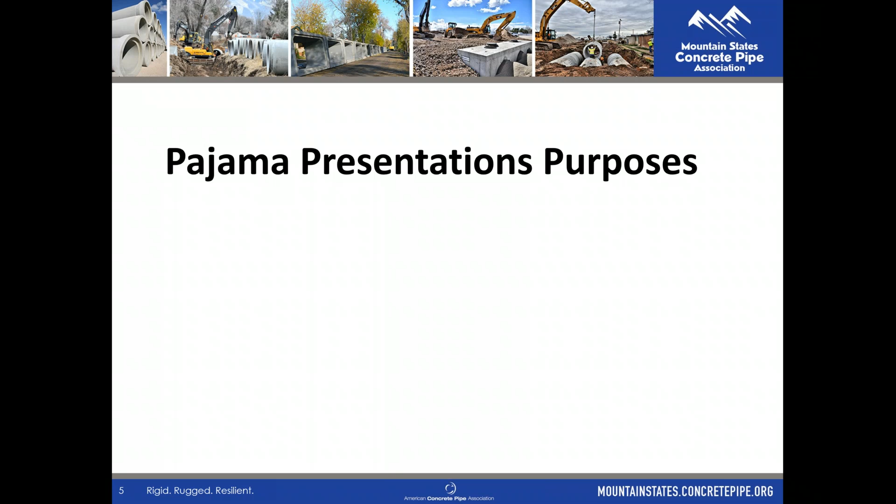So the purposes of these pajama presentations: one, the hope is that we can build some technical skill and provide you with continuing education. I'll be sending out on Monday a professional development hour certificate for 1 PDH for those who need that for engineering licensing. We're hoping we can provide some level of technical skill and help you learn a bit more about pipe or other topics that can help you in your career.

The second purpose is that we're hoping we can provide you with a little break, maybe a bit of entertainment. We're hoping you find some joy and fun in what we present, just hoping to break up the day. A lot of you are working from home or in situations where maybe there aren't as many people around as you're used to, so hopefully this is an opportunity for a little break.

Last but not least, and certainly most important in my mind, this gives me an opportunity to once again be the center of attention so everybody can listen to me and sit as a captive audience, and I can be that center of attention.

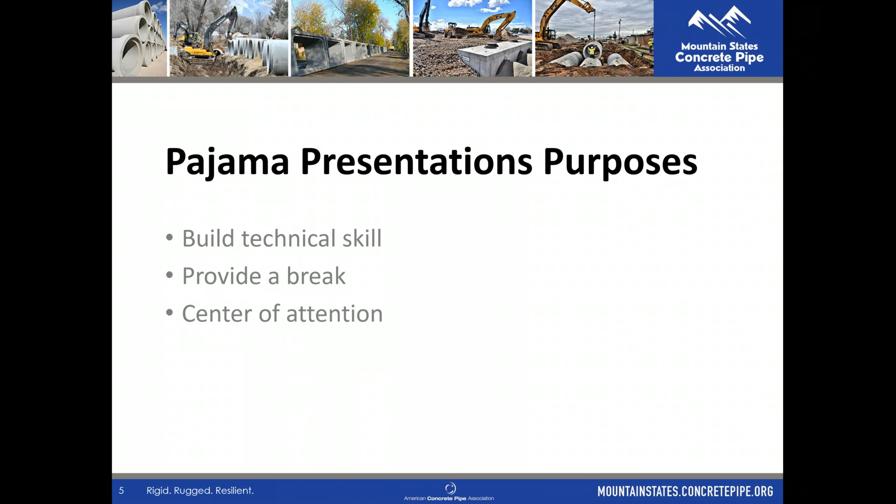As I mentioned before, I do give these in my pajamas, so I always share a picture of what pajamas I am wearing this week. In weeks past I had my Superman, my Santa Claus, my Batman jammies. This week's pajamas are as follows.

My unicorn onesie. I was going to stop you, I was nervous. Nope, this is my unicorn onesie, I'm very proud of this. Are you sure that's not Aubrey's unicorn onesie? That is my unicorn onesie, a gift from my sons. They thought it was hilarious, I thought it was too. Now I wear it unironically and they get ashamed. They bought it for me as a joke and I wear it unashamedly. If I have to go out and get the newspaper or the mail, you better believe I will wear this out in public just to embarrass my children—that's the goal there.

So with that, why don't we do our first poll? I like to do this first poll every week just to check and make sure our polls are working. I'm going to launch that right now. The poll is: are you currently wearing your pajamas? Feel free to answer that question. We'll give it a few minutes to make sure these polls are working.

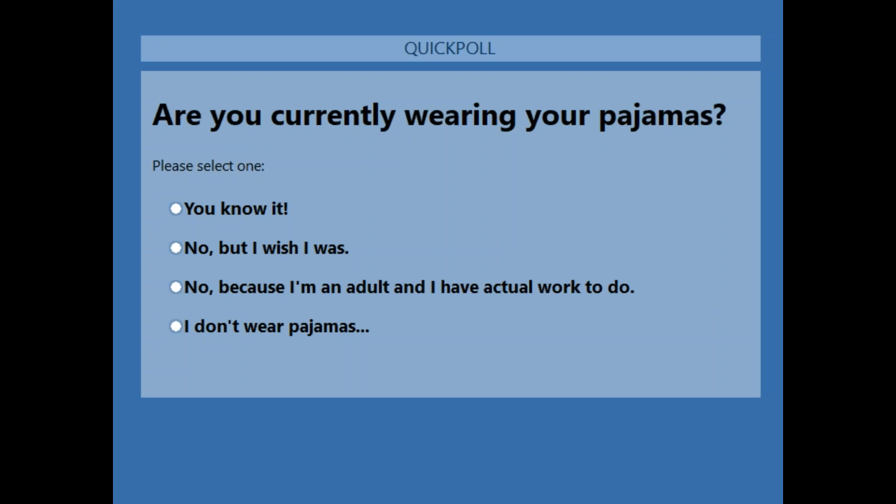Okie doke, it looks like we've got quite a few of you voted there. I'm going to close that and read you the results. It looks like we've gone up a little bit every week on the yes. This is the fourth time I've asked this question—it's gone up from 10% to 12% to 15% and now 16%. Most of you no, but you wish you were—don't I know that. 27% said no because I'm an adult and I have actual work to do, well done. And 27% of you said I don't wear pajamas—ooh, look at you. That maybe was wildly inappropriate for me to share that.

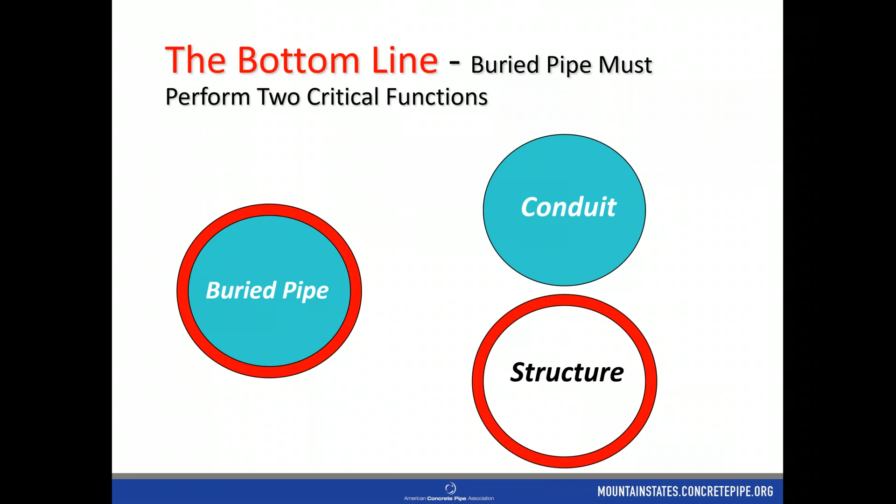Keep that in mind as we focus today on concrete pipe, which we refer to as a rigid pipe material. Other rigid pipe materials would be like clay pipe, which we saw a lot of years ago. I remember replacing a pipe in a sewer line in Ogden City that was almost 96 years old—a clay pipe—and we upsized it to a larger diameter, but it was still in great shape. These rigid pipes will last a long time.

Concrete pipe or rigid pipes are structures that are bedded with soil, so it is an actual structure. Depending on the class of pipe we're specifying, the pipe itself is responsible for between 70 and 90% of the total system strength of that pipe system. So the pipe itself is very strong and durable. The other crowning characteristic of these rigid pipes, especially reinforced concrete pipe, is the long service life. If you were here a few weeks ago, we talked about the City Creek project that was over 100 years old, with portions still in service today and in pretty good shape. These things will last a very, very long time.

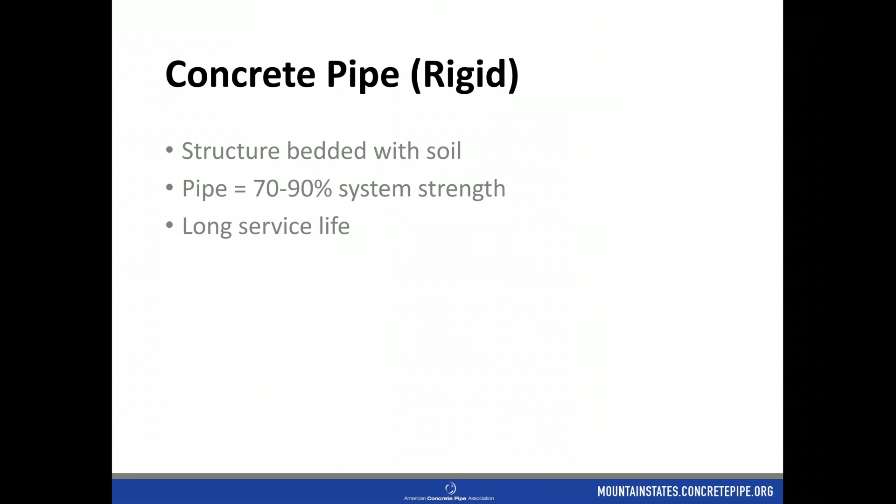One reason is the material. Concrete pipe, we know, gets stronger over time as it cures. But there are other pipes that, depending on the material, seem to fail a little more prematurely than 144 years.

So you have to ask yourself, why would this pipe last so long, and why are other pipes failing? It comes down to installation. This pipe that lasted 144 years and is still structurally sound was installed very well, using the best practices of the mid-1800s, with great care taken to install it correctly. A properly installed concrete pipe will last a very, very long time.

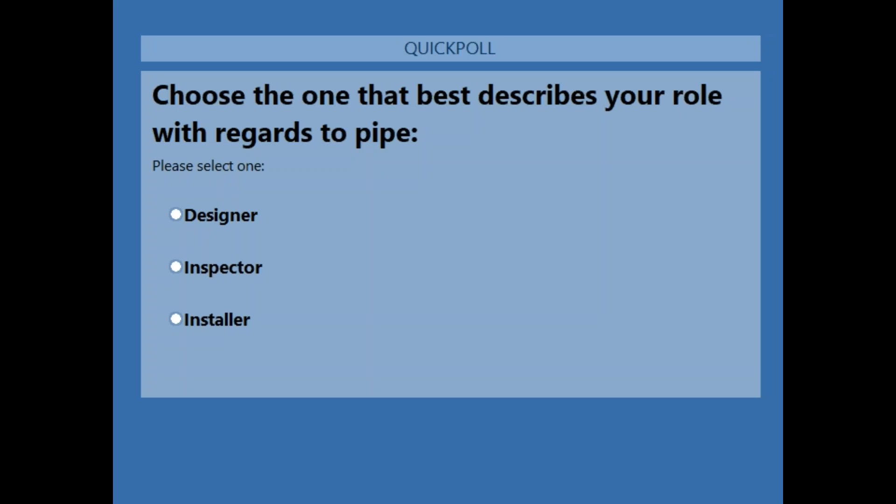Okay, it looks like a majority of you are saying that you're the designer, the project engineer and designer. A couple of installers too, but mostly designers — 78% say designer, 18% do inspection, and 4% are installers. Well, the good news is I've got something for everybody today, so hopefully everyone can take something from this presentation.

Let's move on. Since most of you are designers and engineers, I know how excited you get for good specifications, so we're going to talk about what specifications apply to reinforced concrete pipe. A few weeks ago we talked about ASTM C76, our manufacturing specification, which tells us what our wall thicknesses need to be, what strength of concrete we need, and how much reinforcing steel to put into the pipe. That's what we take into account when building and manufacturing these pipes.

We also talked about testing a couple weeks ago — our 3-edge bearing test and D-load test to determine the classes of pipe, covered under ASTM C497, the testing specification. Today we're going to talk about ASTM C1479, the installation specification. This is the national specification that gives recommendations on how we should properly install these pipes.

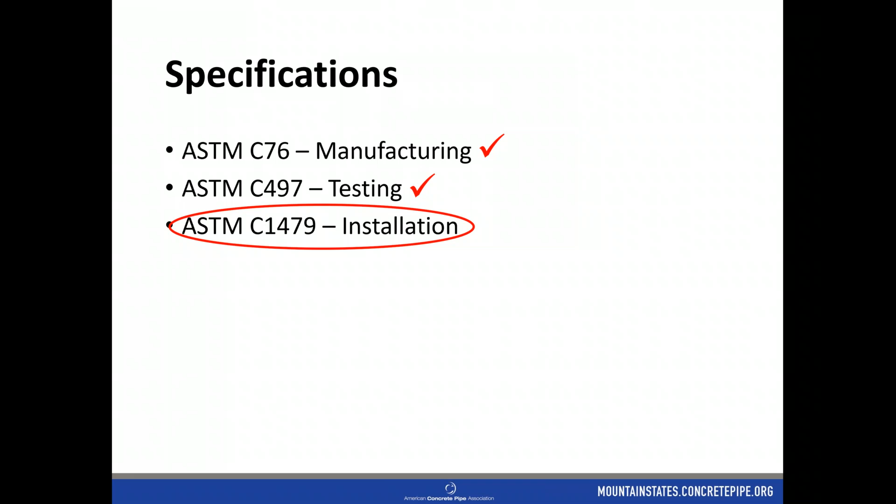At a high level, we're going to talk about two different types of pipe installation. The first, and most common one we see here, is trench installation, where the ground is dug, we make our hole or trench, and then put the pipe inside. There are some distinct design benefits to installing with a trench as opposed to the other type, which we'll get to in a moment.

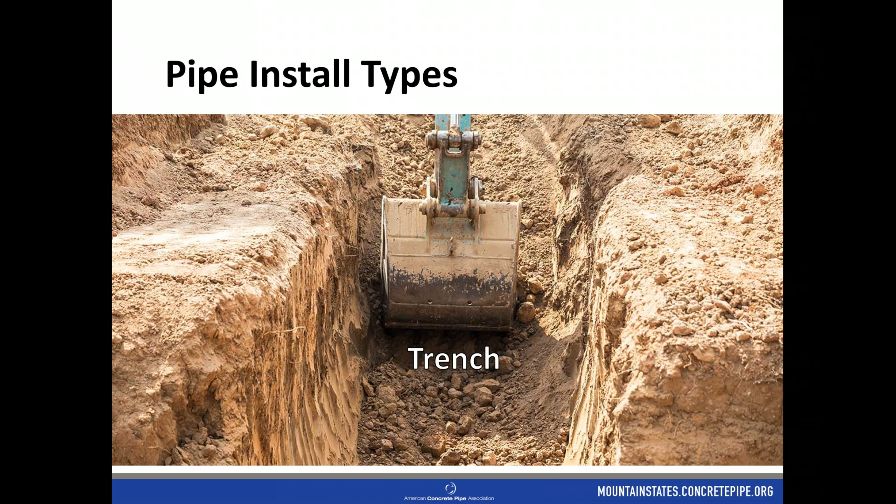With a trench installation, you have the sidewalls where a certain level of friction forces provides some support for the load on top. As we put our backfill material in, it binds and holds that in place, so it's actually a better design situation to use a trench installation. Keep that in mind when determining which class of pipe to use — whether we're using trench installation or the second type, shown here, which is embankment installation.

Okay, now an embankment installation is very different from a trench installation in that the pipe, as you can see from this picture here, the pipe is sitting on the ground, and then we're going to build up our road all around it, or whatever it is that's going under there, whether we've got a dam structure or something on top of that. But we start at the very bottom level. We put our bedding in, we put our pipe on that, and then we're going to build up around that pipe.

This installation method, admittedly, is not as popular here. We don't see it as often. You'll see it every now and then, so it's good to know about it so that you can remember the differences and remember that as we're determining class of pipe, we need to know, are we doing a trench or are we doing embankment? Because it could change which class you need to put in.

So trench, we dig the hole, we put the pipe in, we backfill. It's got the benefits of the friction of the sidewalls of our trench that are going to help and not have as much load on that pipe. Embankment means that we're building it up around the pipe, and it is going to have basically the full load of that material on top of it and the loading on top of it. So those are the differences, trench and embankment.

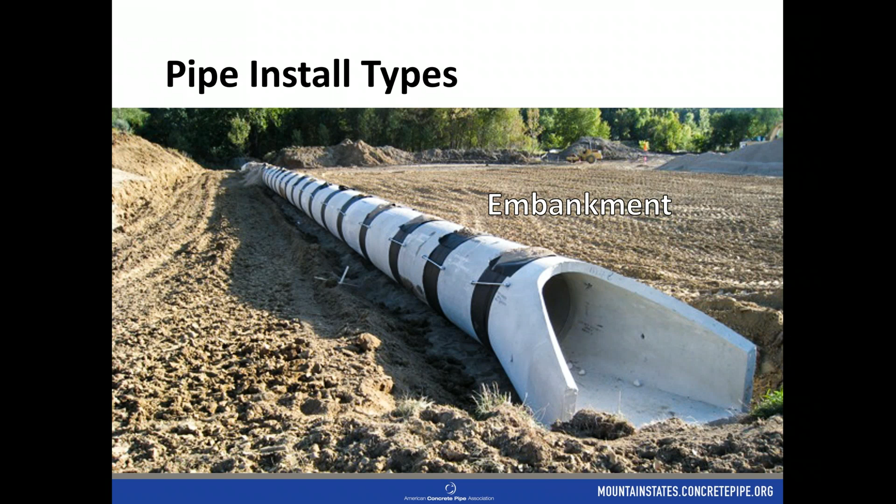And then if necessary, just keep in mind that if you get into these fill height charts and you get into an extreme situation where you're going to have very heavy loads, whether from really shallow cover and heavy loads or really, really deep loads, maybe you'll exceed that 3,000. We can do special design. We can increase the steel. We can increase the mix design so that we have a stronger concrete. So there are things that we can do to make it bigger than a Class 5 pipe.

In our market, the three most common pipes are your Class 3, your Class 4, and your Class 5. We don't typically carry Class 1 and Class 2 in the smaller diameters. If we get into a situation where there's a big price advantage from going to a Class 2 and all we need is a Class 2 at a larger diameter, you might see some of those. But for the most part, we're using mostly Class 3, Class 4, and Class 5 pipes in our designs here.

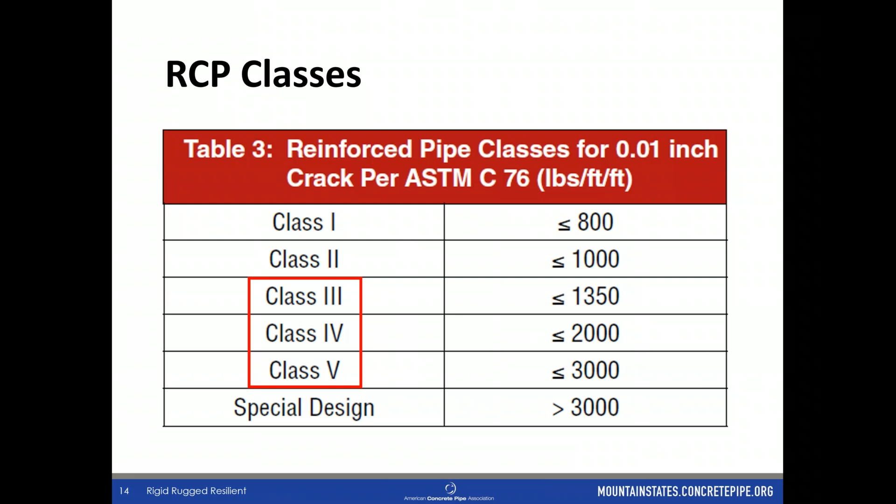So if you want to go onto our website and download our fill height charts, this is another option for you here on how we can determine what classes of pipe. And as we get into installation here in just a moment, I'm going to use some of the diagrams from those fill height charts down at the bottom of our homepage there at mountainstates.concrete.pipe.

mountainstates.concretepipe.org, excuse me, I misspoke there. If you go to our website and scroll down to the very bottom, you're going to see our fill height charts there. You can download them for either circular or elliptical. And so we're going to be looking at the circular fill height charts today. We're going to be looking at some of the tables from there. We're not going to be going into the level of detail of selecting classes, but we are going to look at the trench details and the soil classifications for those. So feel free to download those if you're interested.

And let's get moving on our trench detail. There are some terms that I want to make sure we are aware of before we move on, because when we start looking and comparing and contrasting, I want to make sure that we understand what we're looking at here in this trench detail. So first of all, the first thing I want to point out is that this is that ASTM spec, ASTM C1479. So what we're going to be looking at, some of the tables that I'll be sharing with you are pulled directly from that specification.

If you're using, for example, the UDOT spec, it references ASTM C1479, and the APWA spec, which a lot of our municipal friends use, also references ASTM C1479. So a lot of what we're doing as manufacturers, recommending and training contractors and design engineers, we're basing that off ASTM C1479 because all the specs around here reference that specification. So a couple things I want to point out about this trench detail.

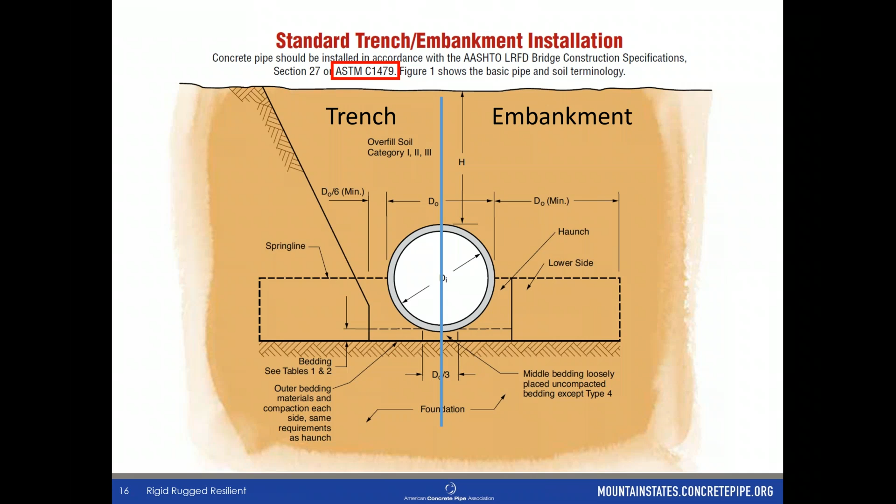All the fill height charts you look at when downloading and reviewing them are all for embankment condition. Remember, embankment is going to give you a more conservative design. So if you use embankment, it might tell you that you need a Class 4 pipe, when if you run it for a trench installation, you might only need a Class 3. Go back and watch that first presentation we did where we went into PipePac and some other options for doing your own design to determine what class you need, but remember embankment's going to be a little bit more conservative. So they're going to show you the trench on the left-hand side versus an embankment condition on the right-hand side. Okay, next up.

The spring line is a term we need to understand. The spring line is the middle line of the pipe, right in the middle. So if your pipe is flowing at 50% full, right at 50% capacity, that line right through the middle of the pipe, that is our spring line.

It's important that we remember that term, spring line, because in a concrete pipe system, the critical pipe zone is the pipe itself and everything up to spring line. That is the pipe zone. So it's important that we do a good solid installation up to spring line, and then we can do our typical trench backfill after that.

That's the important part. When we design these pipes, we're designing them from bedding up to spring line, and then the pipe itself. So that is the pipe zone. That's very important, I know I keep hitting it over and over, and I'll touch on it again during this presentation, but I hope you take that away today. So, spring line, we've got that one.

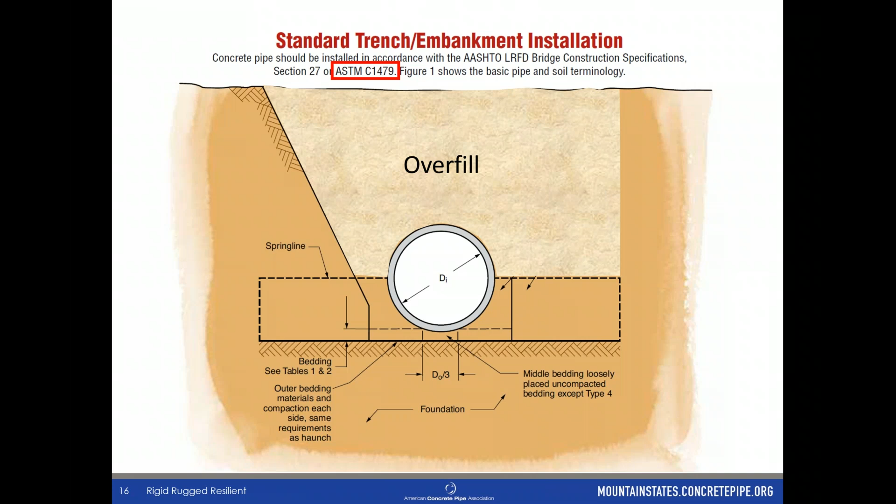Over the top of that, once we get up to spring line, then we put in what's called our overfill or our trench backfill. We are running this strictly off of whatever our trench backfill detail is. We don't have to go over the pipe with our pipe zone material, our structural backfill. We're just using our trench backfill material now once we get to spring line. So those are the terms.

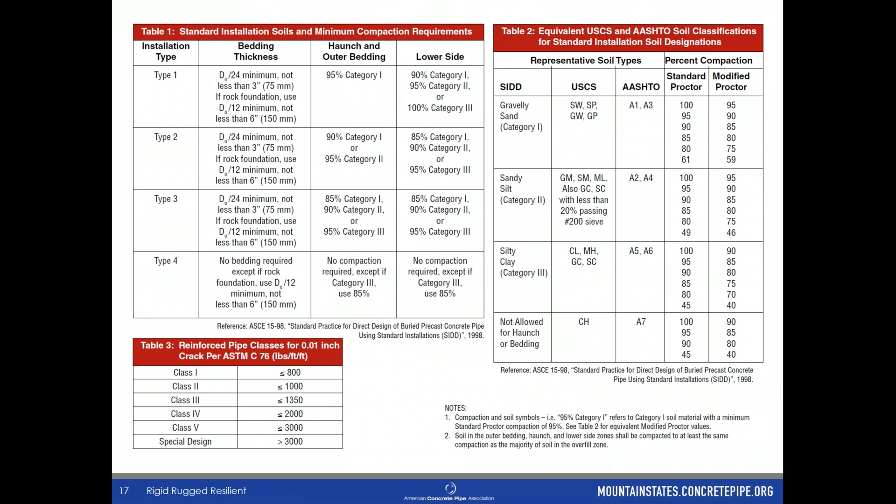So let's look at this table from our fill height charts. I know this is overwhelming and it's a lot of information here, so we're going to take them one at a time. We already looked at table 3 down at the bottom, which are the reinforced pipe classes and the loads necessary for our 0.01 inch crack, so we're going to ignore those and move on immediately. We're going to work backwards here, and go to table 2.

This is our soil table. It has all of our different categories of soil: category 1, category 2, and category 3. Our category 1 soils are going to be those gravelly sands, the AASHTO A1, A3 soils, and it also gives your percent compaction, your proctors there. It also gives you a summary of your USCS soil type so you can determine, depending on what method you're using to determine your soils there. Our category 2 are going to be those sandy silts, your A2, A4 soils - a little bit more sandy and more silt in there, not as much gravel. And then your category 3 soil, that's going to be your clay, much more fines - your A5, A6 soils. Below that, where we start getting into our A7 AASHTO soils, these are not allowed for haunch or bedding. These are not great, even in any installation type. We don't want to use these extremely clayey soils. We want to eliminate as much of that expansive soil as possible, so those are not allowed. But we've got our category 1, category 2, and category 3 soils.

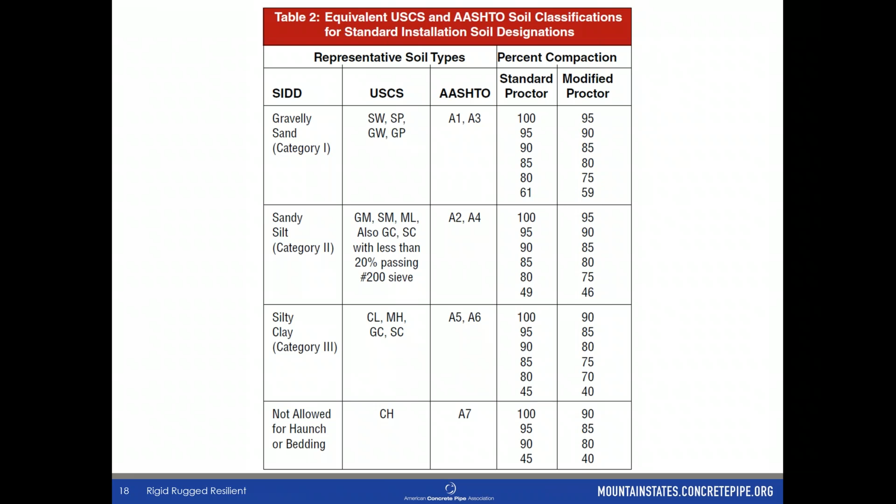So when we look at our next table, table 1, now we can look at the different types of installation. There are 4 different types of installation. Your type 1 installation is going to be that really, really strong, stout installation.

The interesting thing is, yes, we might spend more time and money on the installation type, but when we have really good bedding and haunch support, we can typically use a lower class of pipe. So if you needed a class 4 in a type 2 or type 3, going to a type 1 installation might let you save money using a class 3 pipe. That's something to consider when comparing fill height charts and types of installation.

Your type 1 is going to be that really strong material. You're going to have 95% compaction of category 1 soil, that really good category 1 soil, in your outer bedding. Remember, that's the area below your bedding, and your haunch is the area between your bedding and your spring line. Your bedding thickness, if you're using D/24 material, should be not less than 3 inches.

So you can go to 3 inches there. If you're using D/12, a little bit bigger material, not less than 6 inches. So if you have that smaller material, you'd want about 3 inches of bedding. Remember, the middle is loosely placed, not compacted there.

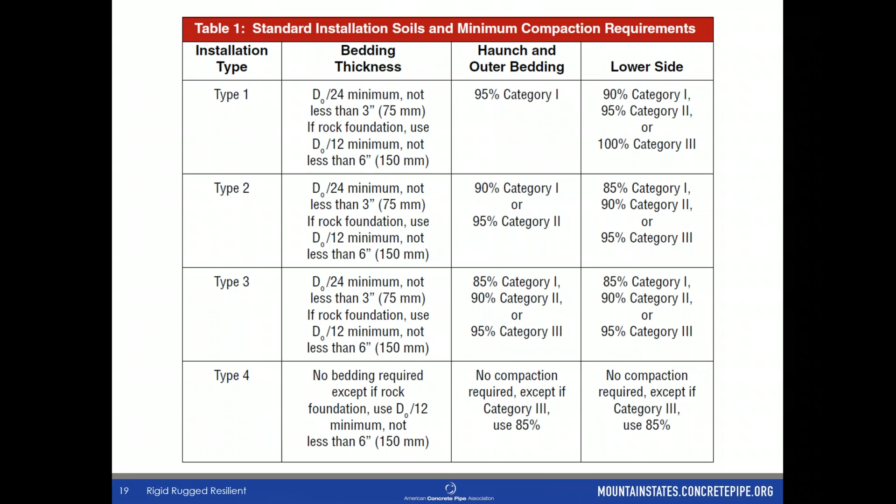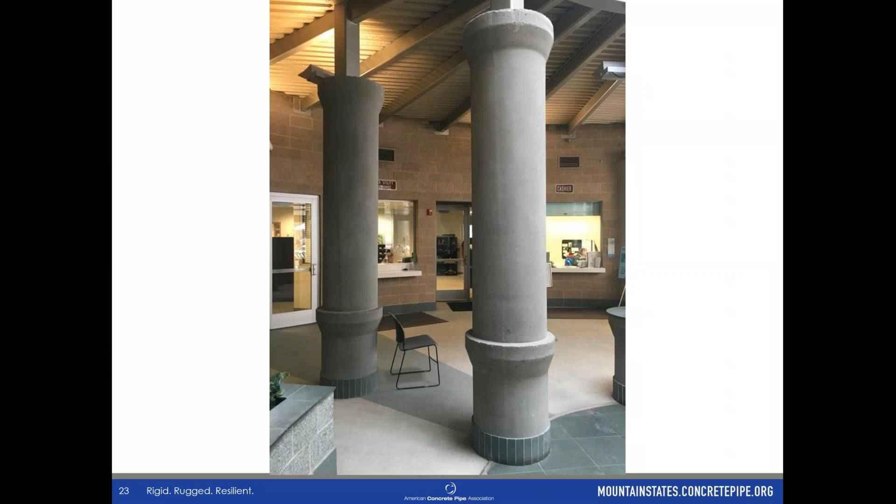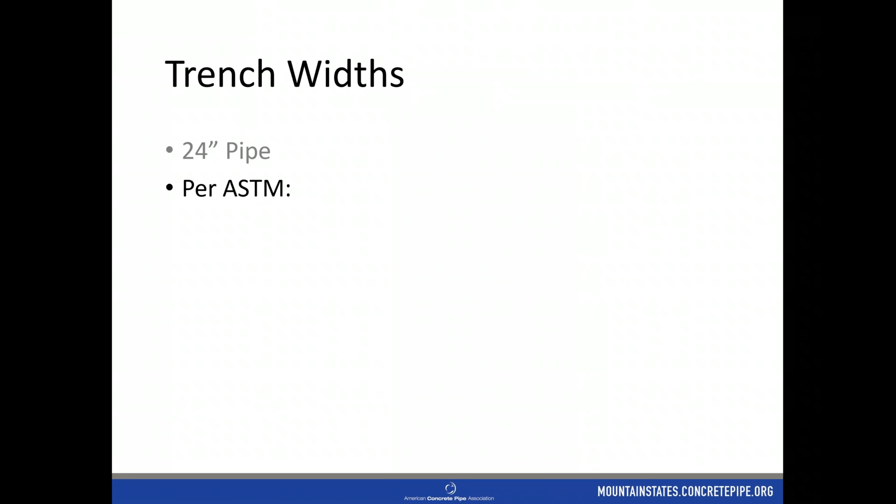When we talk about trench widths, this is an interesting point—let me give you an example. Let's take a 24-inch pipe. The ASTM spec says you should use a 40-inch trench for concrete. Now I think to myself, a 24-inch pipe, B-wall, which is common here in Utah—we learned a few weeks ago that with a B-wall, you take the diameter of the pipe and add an inch for the wall thickness. So diameter in feet would be 2 plus 1 is 3, so the wall thickness is 3.

So our total outside diameter of a 24-inch concrete pipe would be 30 inches. I look at this 40-inch trench and think, per the ASTM national spec, we need a 40-inch trench, so that's 5 inches on either side of that pipe. Is that going to be enough for me to get the compaction that I need? If I have to do a type 1 installation, am I really going to get 95% compaction in those haunches with only 5 inches between the trench wall and the side of my pipe? That's a real tough call. I'm not a specialist, I don't do construction all that much, so I don't know if I could do that. But that's a great question on whether that's wide enough.

Just for reference, if you're using a plastic pipe at 24-inch, the recommendation is 47-inch. That still adds about 3.5 inches on either side, but you're still under 12 inches, which I know a lot of compactors are about 12 inches wide. So my recommendation, when you're putting these trench details together as designers and telling contractors how to build and install these pipes, is we have to have a trench that's wide enough for compaction. So keep in mind that if we're just referencing the national specs, they're not always the best for constructability.

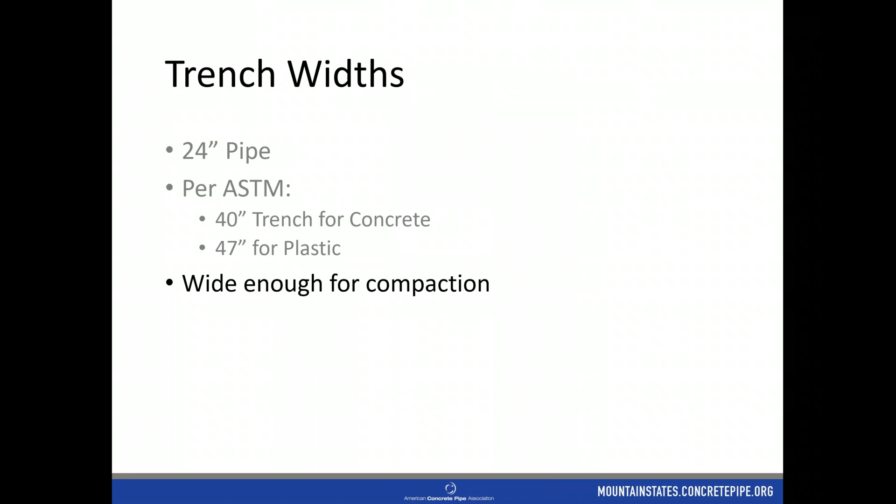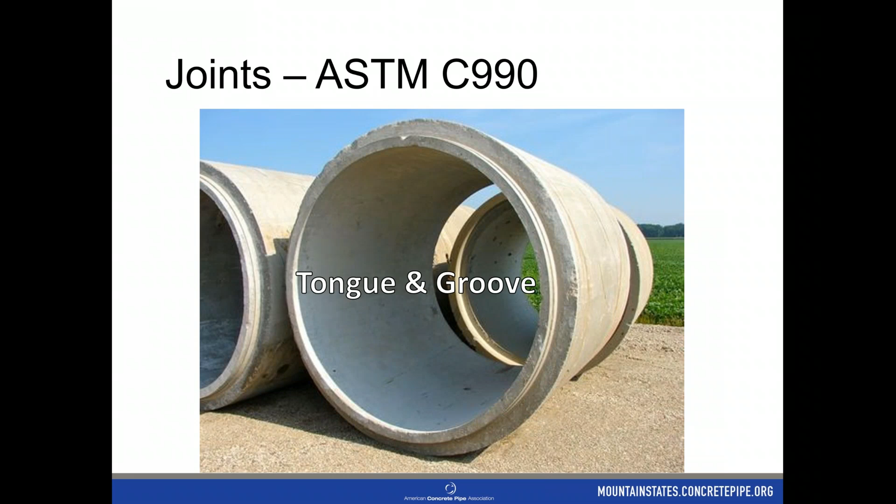All right, next up we're going to talk joints real quick. Two different joint types, per spec ASTM C990: tongue and groove, and bell and spigot. Tongue and groove is an inline joint, so the pipe ends are flat when they come together. We see these often in our market with box culvert or elliptical pipe, but not very often in smaller diameter circular pipes. So keep that in mind—tongue and groove is mostly for our box culverts and elliptical pipe.

Our more common one is the bell and spigot. We've got that bell that flares out and goes over the spigot end. There's a bit more concrete thickness at the bell so it can provide additional support and is less likely to break there. That's the more common one, especially at the smaller diameters here locally.

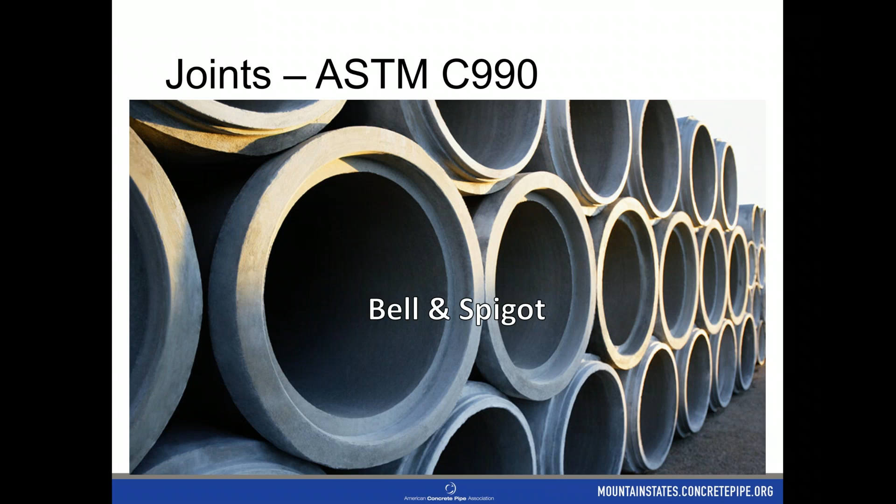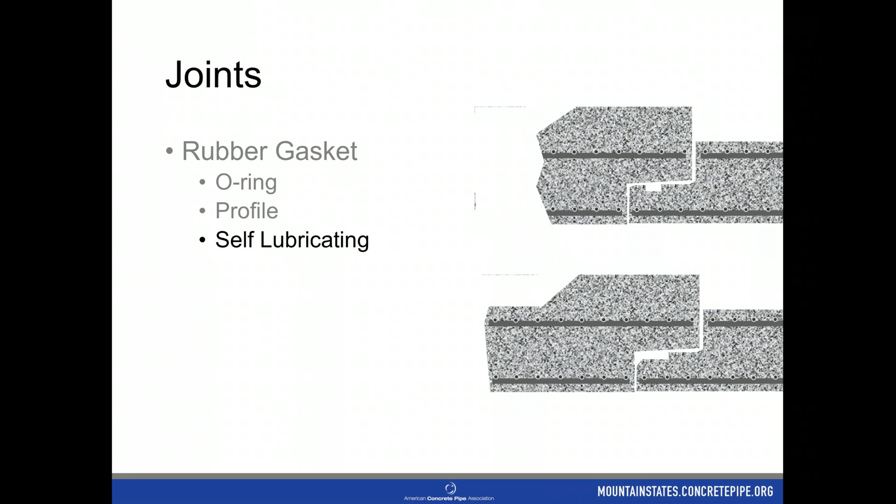We had some great questions on some calls yesterday with engineers about joints and gaskets, so I wanted to share that with you so we can get an overview of the different types of rubber gaskets used in these joints. This mostly discusses the bell and spigot joint and the types of gaskets used on these single offset joints. The three types you'd see are the O-ring gasket, the profile gasket, and the self-lubricating or pre-lubricated gasket. I'll go into detail on all three, but the specifications are ASTM C361 and C443.

The purpose of these, if installed correctly, is that they're rated to 13 PSI. So you can have a little bit of head on your pipe, but that's what these are designed to hit. If your storm drain system is backing up a little bit, it should be able to handle that. You're definitely not going to use these in an extremely high pressure situation, but in those lower heads of storm drain backing up, you should be fine with that 13 PSI.

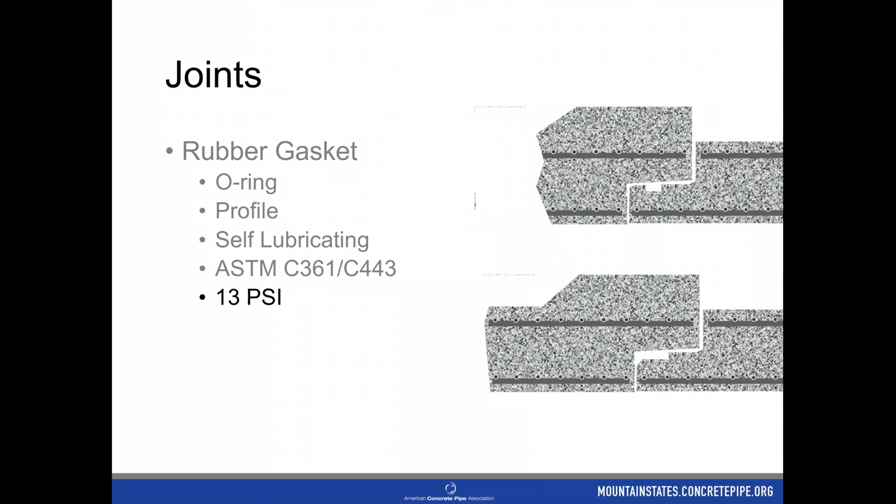So the first one we'll talk about is the O-ring gasket. This is the round, circular gasket that fits inside this little notch in the spigot. We lubricate the gasket, the spigot, and the bell—we want as much lubrication as possible, because as we home this pipe and push the spigot end into the bell end, the gasket is going to spin inside this little notch. If we don't have enough lubrication, it's not going to spin, and the way it compresses inside the bell and creates that seal all the way around is by spinning as that bell goes in.

If there's not enough lubrication, the edge of the bell can grab the gasket and push it out of place, so we won't get that seal. Other issues can occur if it's not able to spin in that notch - it can grab and pop your bell, so you could see cracking or issues with our bell or spigot inside the pipe.

One thing you also want to do with all of these gaskets is equalize the gasket. This means once the gasket's on, you'll run a screwdriver or something around the pipe a couple of times, in between the gasket and the pipe, to make sure you don't have too much rubber material at the top or bottom, because that could cause the bell to pop off potentially. So we want to make sure we're equalizing that.

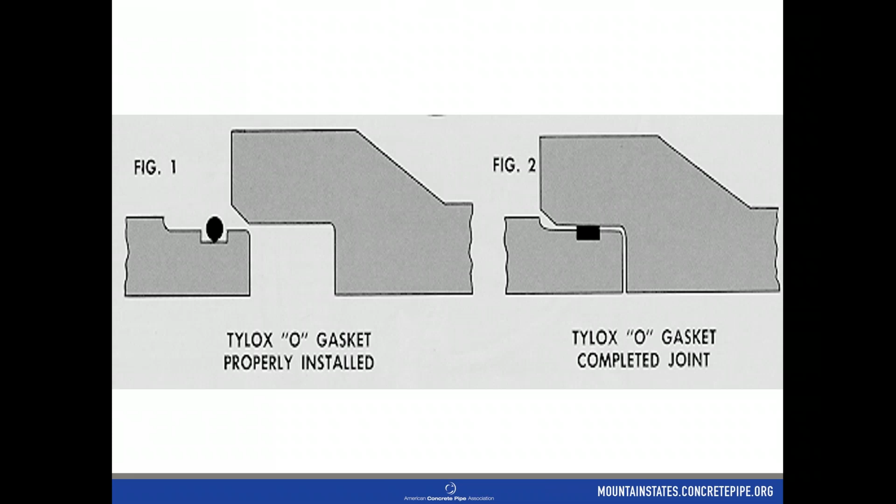The second type I mentioned is the profile gasket. Again, you put this on the pipe, lubricate the gasket, and once it's on there, lubricate the spigot and gasket, and lubricate the bell. Then as you home this gasket in, it folds over on itself between the spigot and the bell, and it's got enough mass in there that it creates that seal between the spigot and the bell.

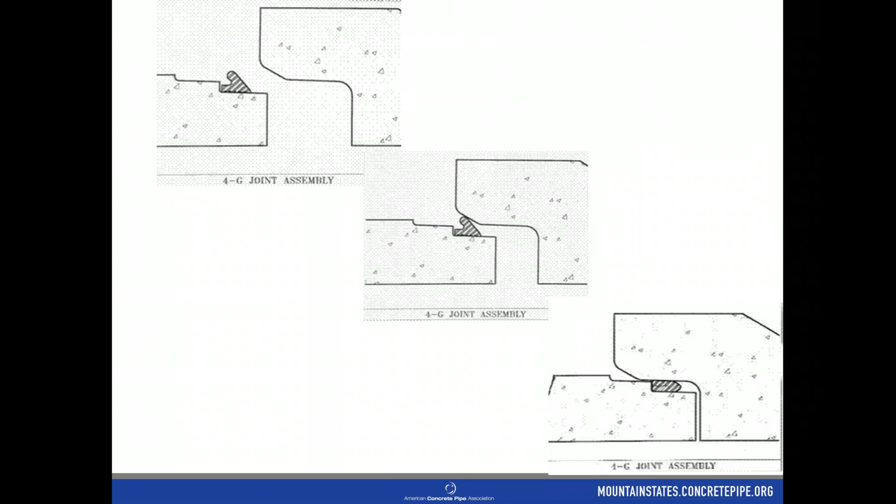This is the third type I mentioned - the self-lubricating or pre-lubricated gasket. This one goes on just like the profile gasket. We want to make sure it's facing the correct way, both the profile and the self-lubricating gasket. If facing correctly, this one would have the lubrication chamber at the edge of the spigot.

So we put that on - no need to lubricate this. As I mentioned, this is a self-lubricating or pre-lubricated gasket, so there's no need to lubricate. We've seen issues in the past where a contractor had lubrication from another project, took a pre-lubricated gasket, and lubricated it up really good.

It never got its seal. As they were homing it, pulling it in and out trying to get it homed, the gasket slid off, and we had issues where the gasket was hanging on the inside of the pipe when we went in and videoed the lines afterward. So you don't want to lubricate these.

You want to get that seal on the spigot. As you home that pipe, bringing the spigot into the bell, it's going to fold over, and those teeth in that lubrication chamber are going to grab one another and lock it into place so that we can have our seal.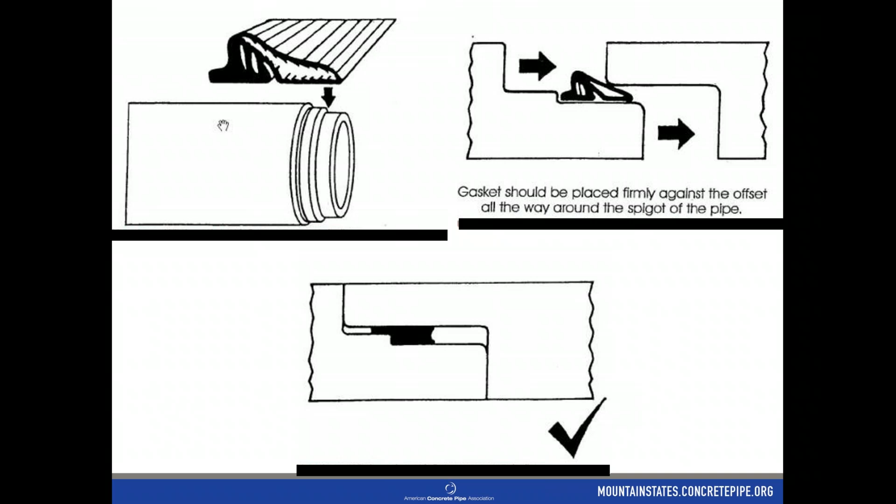You can see in the picture in the left-hand corner where we put our gasket. As we start homing it in, in the second picture, and in the third one they've locked into place. This is what it looks like if you were to cut it in half - that's what the lubrication chamber looks like, and those little rubber teeth will grab, bind, and connect so it won't shift and move.

So that is rubber gaskets - the three different types you'll see. These self-lubricating gaskets are becoming more and more common. We're seeing those more in our market, where manufacturers are using them more often, so you should familiarize yourself with them. We had a great question yesterday about self-lubricating gaskets, so we wanted to point that out.

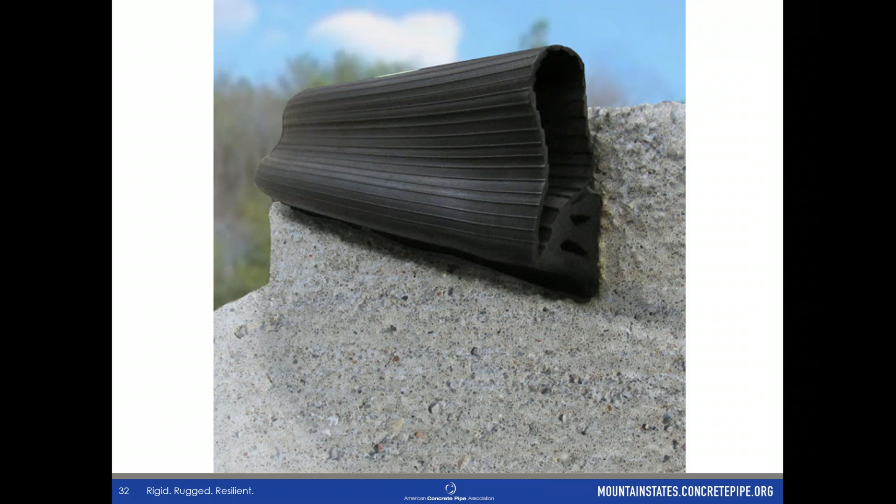It takes just a few seconds to dig those bell holes. The reason is, if we were to come in and load this pipe, if we were to have these pipes sitting on the bells and we start loading them and put a load on top, these pipes are going to want to deflect.

Now, we know it's a rigid material and they don't really deflect. So instead of deflecting, we're going to start seeing these little cracks occur right in the middle of the pipe, circumferential cracks. It's interesting, when I look at videos I can see every single pipe that has a crack right in the middle, a circumferential crack. It's pretty clear that somebody didn't dig bell holes. So we want to make sure we're digging those bell holes and taking care of those.

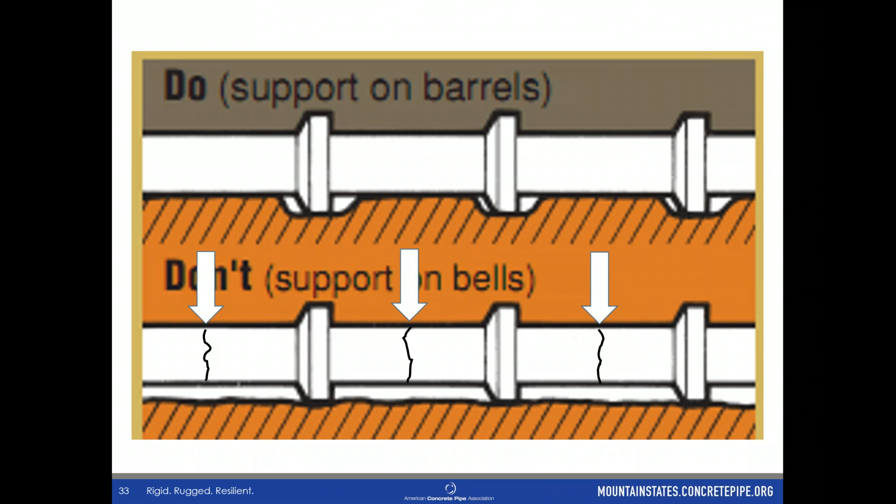Now we're going to have a quick little break here while I show you a video. I'm going to see if this works. This is a video of Randy inspecting a pipe, an old video I found of him doing a pipe inspection when he was younger, a lot younger. So I'm just going to show it.

Anyway, so there you have it.

Just wanted to share that with you so you could see Randy doing his thing.

When we're homing these pipes, if we're going to use a pry bar to home it, we want to make sure we provide some wood in between so that we're not damaging the pipe itself.

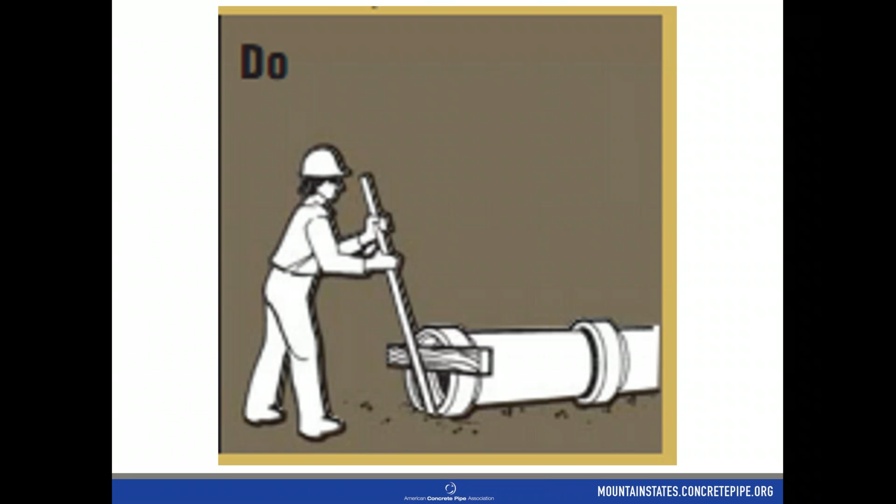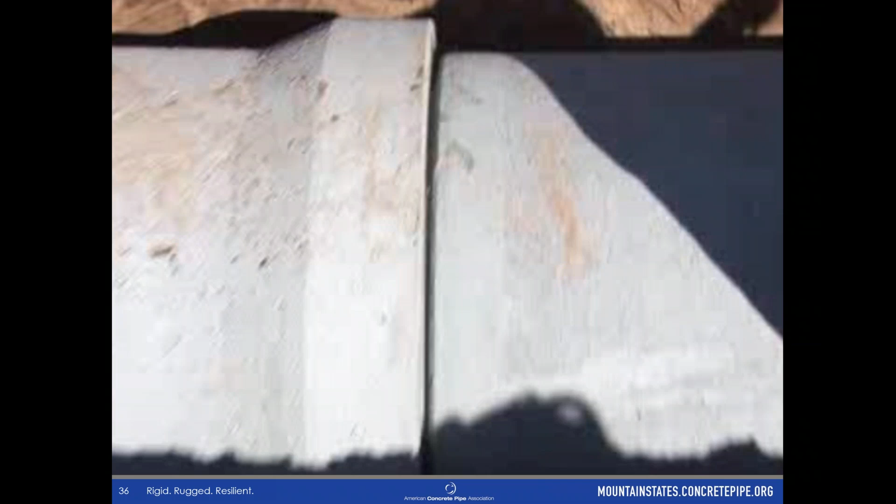So you don't always have to have the pipe completely homed for us to be able to get that 13 psi. That's really what our goal is, we want to make sure we're doing it. So these joints are designed to be able to handle a little bit of a gap.

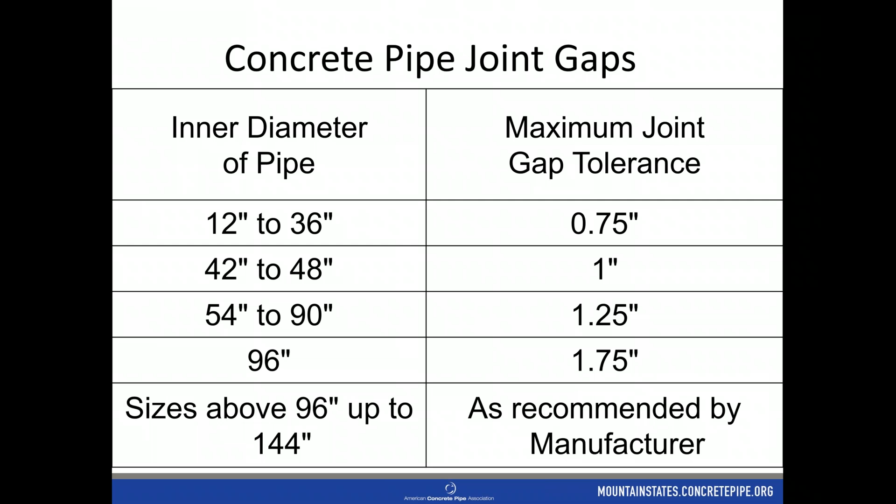Once we get the pipe homed and in place, then we start bringing the backfill. If you notice in this picture, this is a trench where they used a 56-inch trench on a 24-inch pipe. So they should have adequate room to take their shovels and use those to compact and shovel in and knife in underneath those haunches and get that material underneath the pipe there.

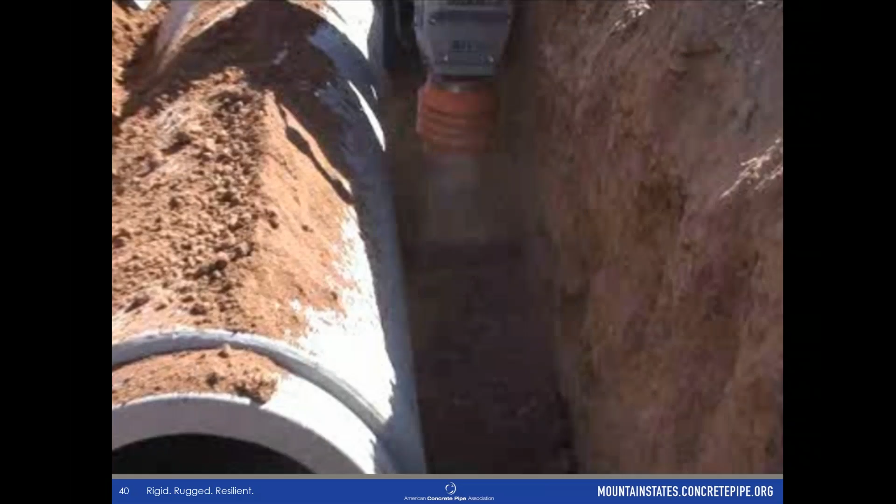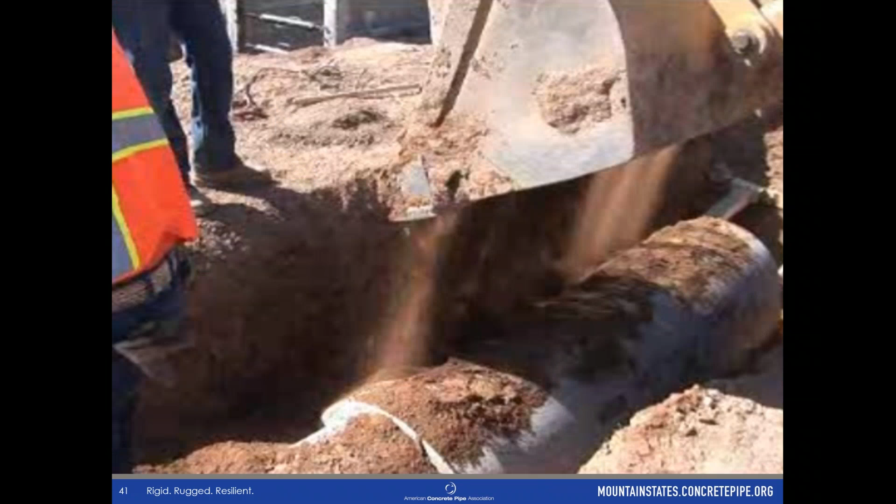Another here, if you notice, they do have enough room for the compactor to compact against that, in between the trench wall and the pipe wall. So we want to make sure we've got enough space there. They're doing a couple of lifts here, putting in another load of soil on top, our backfill and good material so that we can compact.

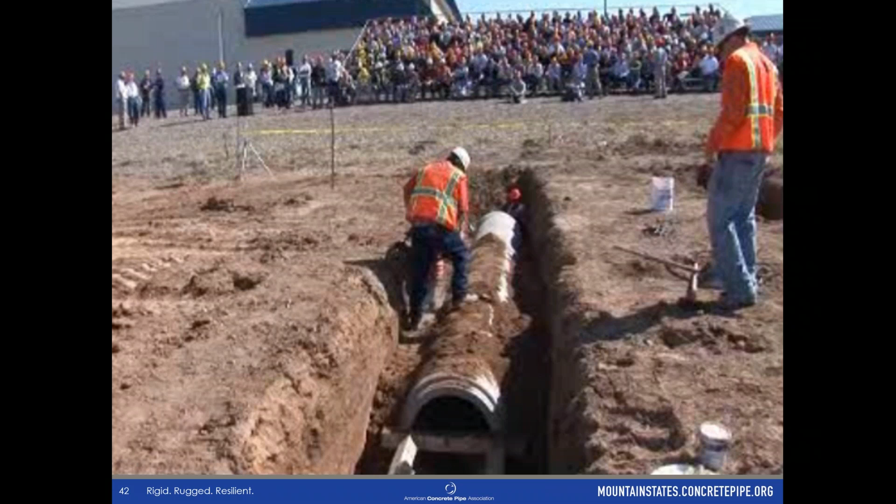And in this picture, now they're up to spring line and we're done. This is our critical area of that pipe. So we put that up to spring line, and then we can just put our trench backfill material in after that.

I just wanted to share a few practices you should avoid. Number one, you should avoid homing the pipe with the excavator bucket if you can avoid it. If you come in and smash the pipe with that excavator bucket, you can cause damage to the pipe. So we want to use either pipe pullers or a pry bar, maybe putting wood in front of it to cushion against it, but we want to avoid that if we can.

Another one is regrading the bedding when the pipe is homed. So if we home that pipe in and then realize, oh no, we're an inch too high, we're off grade, we need to pull that pipe back out, regrade it, and then put it back in.

If we were to just lift that pipe up and start grading underneath it, we could pop a bell or a spigot and cause some damage there.

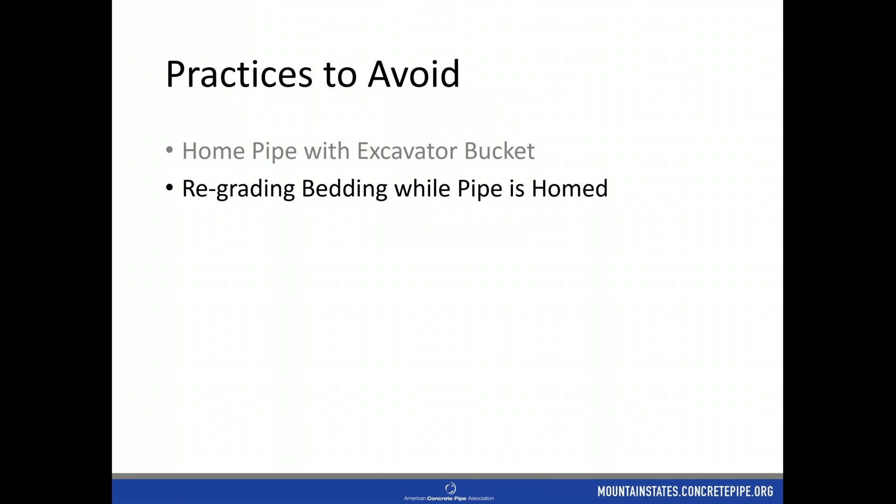Another one is using our excavator bucket to put the pipe on grade. If we're a little bit short, we don't want to just smash it with the excavator bucket. If we're going to lightly push it down a bit, we can use some type of wood, put a 4x4 on top of it, so you've got that cushion between the metal of the bucket and the concrete pipe. We don't want it smashing in there and causing unnecessary damage.

And the other one would be improper joint lubrication, whether we're putting inadequate amounts of lubrication on joints that require it, like our O-ring or profiled gaskets, or if we're using lubrication on a self-lubricating gasket that doesn't need it. That could be problematic as well.

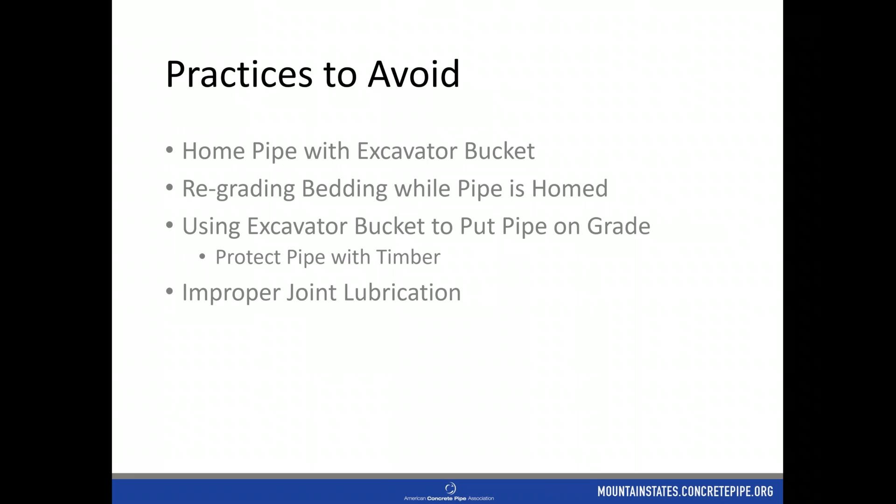So I have a question for everybody, consider this. This is a frequently asked question we get from contractors. He comes to you as the design engineer and says, hey, can I substitute flexible pipe, either plastic or corrugated metal, for RCP on my project? This is a very common question, so I'm going to put it out to everybody here. Can you substitute flexible pipe for RCP in a project? Go ahead and answer. The answers are yes, no, I don't know, or it depends.

All right, can you substitute flexible pipe for RCP on your project? Okay, looks like, I'll give you another couple of seconds here.

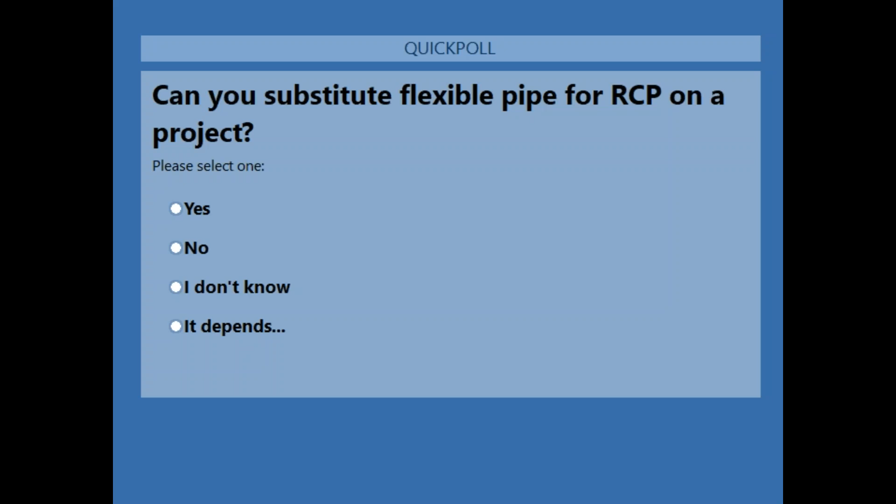Okay, so a handful of you said yes. A handful of you were honest and said, I don't know. 15% of you say no, and 72% say it depends. Okay, the correct answer is it depends.

Here's what we've been getting a lot lately, and this is why I bring this up. We've been having a lot of questions from engineers about pipe availability. We are still manufacturing pipe, running full crews to keep up with demand, and even with COVID-19 going on, we are still considered an essential business for the construction industry. So we are manufacturing pipe. We've been getting questions saying, we're told that your pipe is out 12 weeks or 15 weeks, can we substitute for another material, whether plastic or corrugated metal? They've been calling asking, is it true that you're out this far? We've been able to answer and say, in most cases, no, we are not out that far. For specialty cases it could be a little longer, but for the most part we're in a matter of weeks, 4 to 6 weeks typically. But you'll have to reach out to each individual manufacturer.

So the answer is, if a project is designed for concrete pipe, designed for RCP, flexible pipe is not an equal substitute. So keep that in mind. It's not just an equal substitute, you can't just say, all right, we're going to flip it over. You have to update the design. It must be updated if a contractor changes to flexible pipe. This is for those projects that have specific details, trench details, and specifications for concrete pipe. You cannot substitute it over without long-term repercussions for the pipe and the installation.

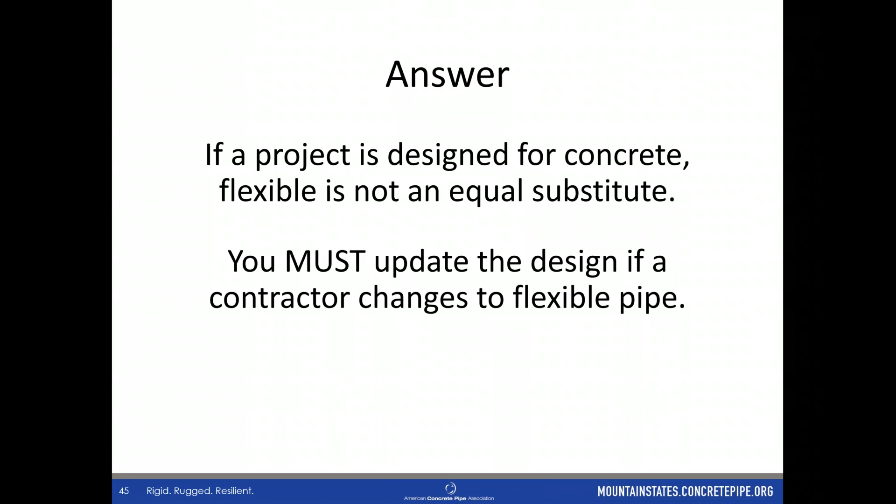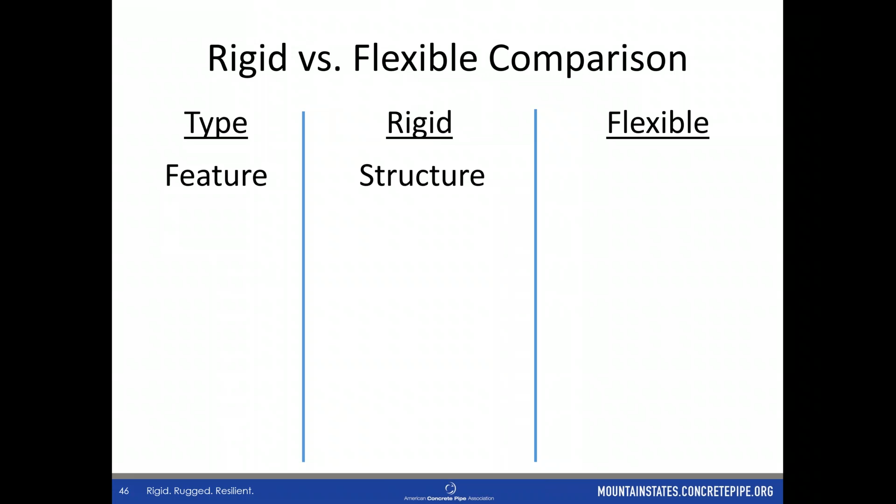I'm just going to do a quick comparison table here and show a few differences, because we have to understand that these materials are different. We're going to have a rigid column and a flexible column, and I'll show you the differences between the two at a high level, so you can understand why we can't substitute these. So the first one is rigid pipe. We mentioned at the beginning, rigid pipe is a structure that is bedded with soil. Flexible pipe is a liner that requires the soil around it to become the structure, you have to compact that soil to build the structure. So every pipe system has to be both conduit and structure, right? Concrete pipe is the structure that we're delivering to the site.

Flexible pipe is a liner that requires you to design and install the structure in the field.

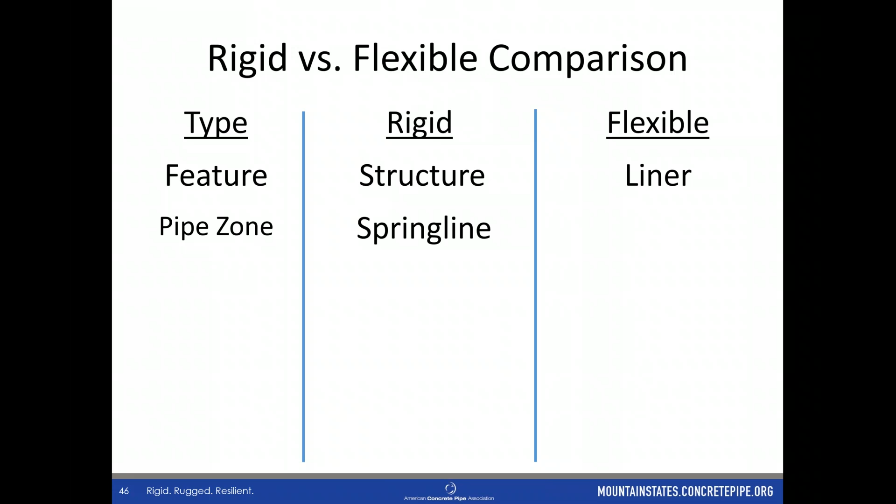The pipe zone is different. The critical pipe zone for a reinforced concrete pipe is up to the spring line, so from the bedding to the spring line is our pipe zone. Above the spring line, you can backfill with your typical trench backfill. For flexible pipe, it's typically 12 inches above the pipe, depending on loads, but a minimum of 12 inches. So where you can stop your compaction and backfill at the spring line for concrete pipe and use typical trench backfill material and compaction requirements, flexible pipe requires this to go 12 inches above the pipe, so significantly more structural backfill and compaction.

The lift thicknesses for concrete pipe are not specified in the specifications. ASTM C1479 doesn't give a specification on lift thickness, only what the compaction should be, so if you can get to those compaction numbers, the contractor can determine how many lifts he needs. The flexible pipe is different. The specifications, ASTM D2321, and manufacturer recommendations for most of these pipe materials call for 4 to 6 inches of uncompacted lifts, so for a 24-inch pipe you could see anywhere from 7 to 10 lifts. Significantly more lifts, because we have to build that structure in the field.

Now let's move to the structure. We manufacture that in the plant, quality control it, and ship it to your job site. With flexible pipe, the structure is built in the field. The design is handled by the manufacturer for concrete pipe - we design according to ASTM specs or do direct design for pipes that require more load than the ASTM specs allow, taking care of the structural side. For flexible pipe, the project engineer is the one who has to do the design.

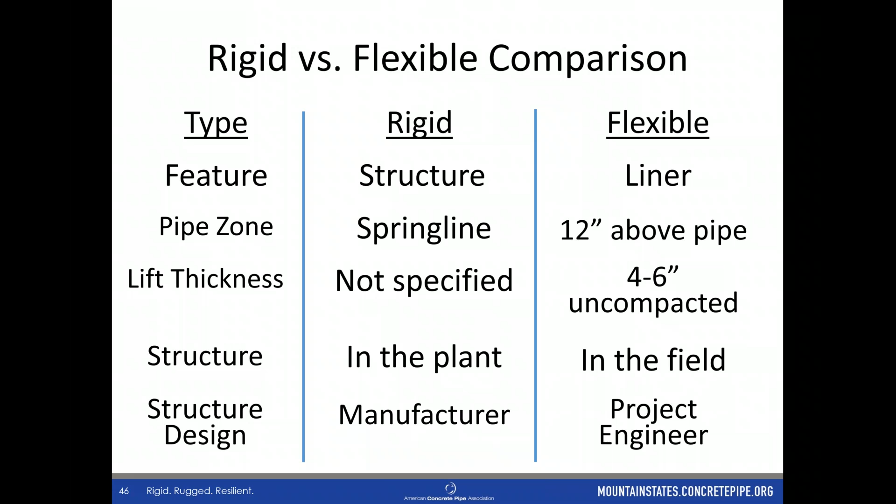I'll close with this slide. If we have a flexible pipe and we load it, it's going to want to deflect outward, so it's very important and critical that we have strong, stiff material on the sides of that pipe. That's why we need 4 to 6 inches of uncompacted lifts up to 12 inches above the pipe. With a rigid pipe, since it's stiff, it's not going anywhere, so we're allowed a little more flexible soil and material on the sides. Those are the key fundamental differences between the two, and why we cannot substitute a flexible pipe straight across the board for concrete pipe.